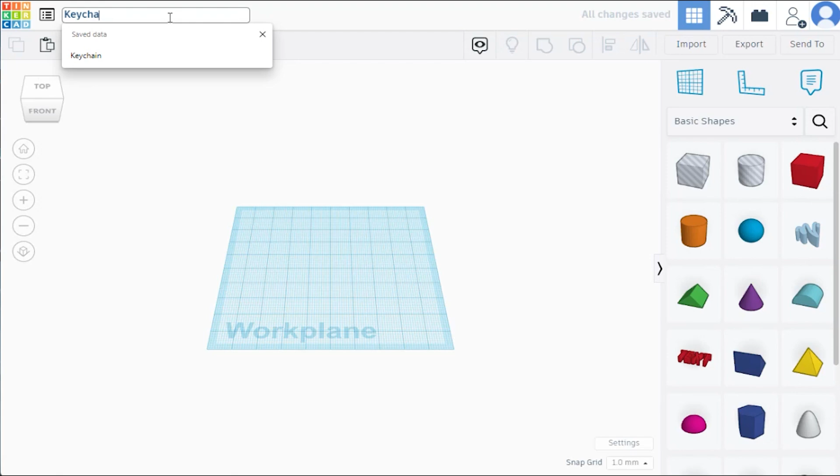Your first step, as with any project, is put a name on it. I'm just going to call this keychain. You can be more creative or less—that's just the easy one for me.

The next step is I'm going to bring out our base of this project. Now I'm going to take the mouse over here, and I'm going to drag and drop your block right from there to there.

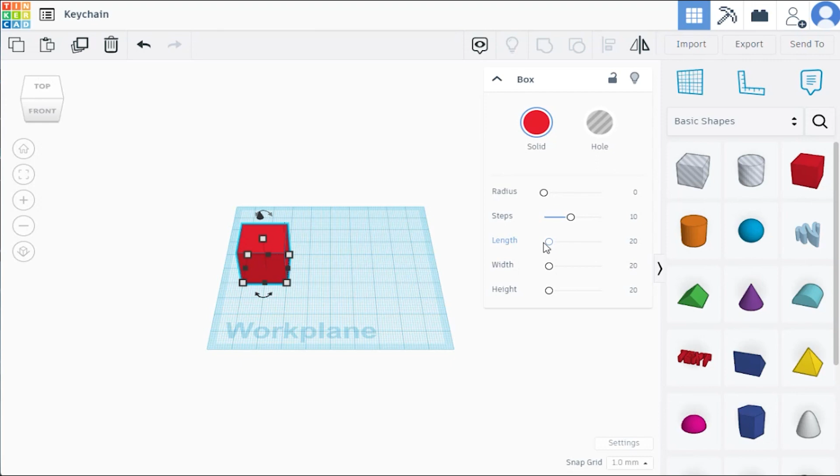Now there's 2-3 ways, depending how you look at it, for our next step, as we need to elongate and then put the measurements to this block that we need. So I can go over here and change it that way, or I can click on these white arrows and pull it long and wide. But what I like to do is click on the white, and it'll give these numbers, as I like to be accurate. So I would recommend 79 millimeters, and I'm going to recommend 22 millimeters.

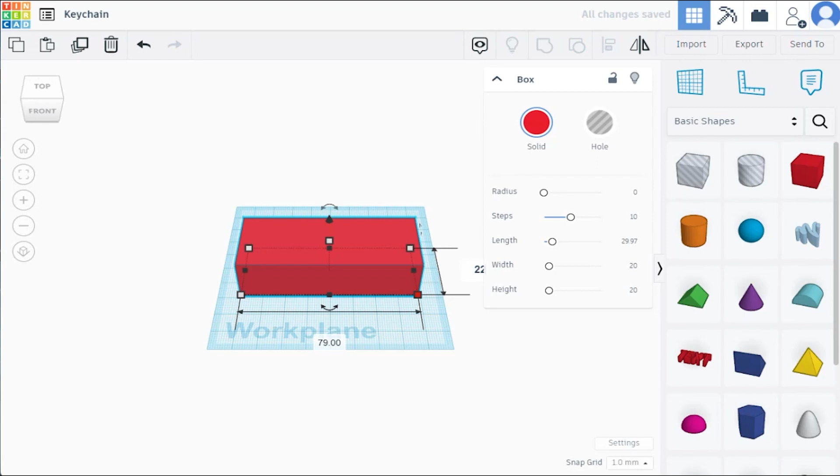Okay, and then I'm going to use the wheel on my mouse to just move this to where I want it, as I like it to be right in the middle, and I'm going to close this as that's not needed anymore. Now that, as we can see, is a little too thick, and if you're wondering how I'm moving the camera, I'm clicking on the right button on my mouse, and that's about it.

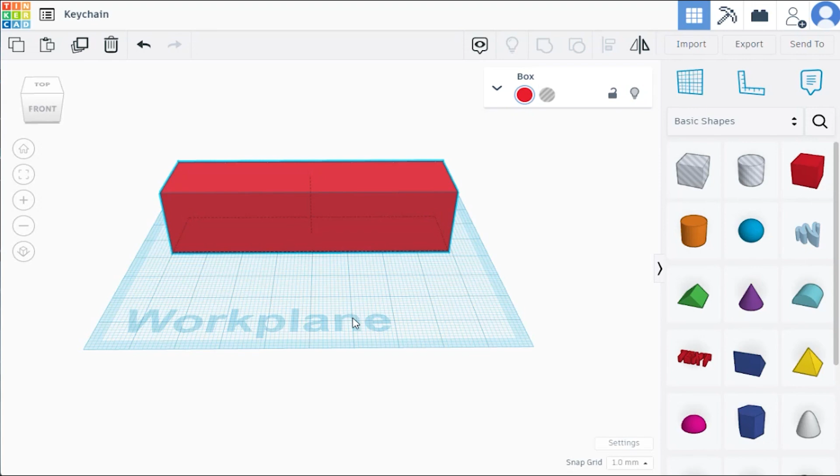I'm going to shrink this because it's a keychain, so we want it to fit in your pocket. I'll click on the white to set the thickness - you can drag it with your mouse, but I prefer to just type the numbers in. I'll click on the number with my left mouse and put 3. Now I have a nice flat surface to work from at this point.

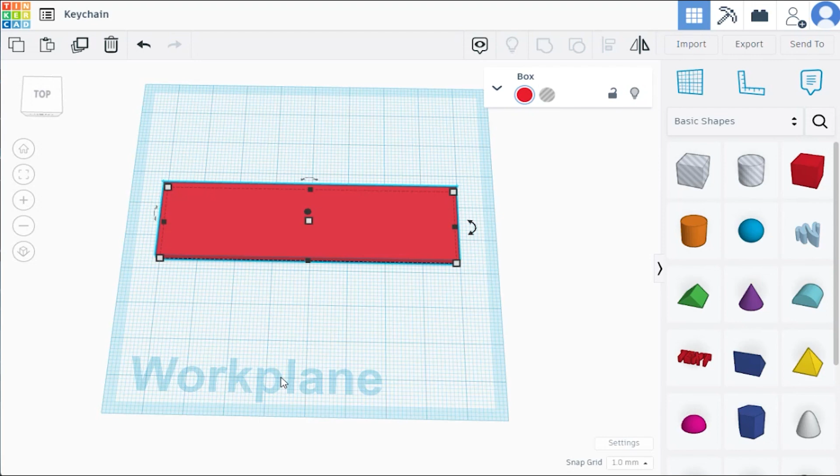The next thing I'm going to do is click off the screen with my left mouse so you can see the arrows disappearing. I'm then going to go over to the text and drag and drop it. I'm not going to put it on right away - I want to be able to make it look the way I want without worrying about messing up what we've got already here. So I am now going to bring this down. As we can see, we can move this by left clicking, and we can see the text.

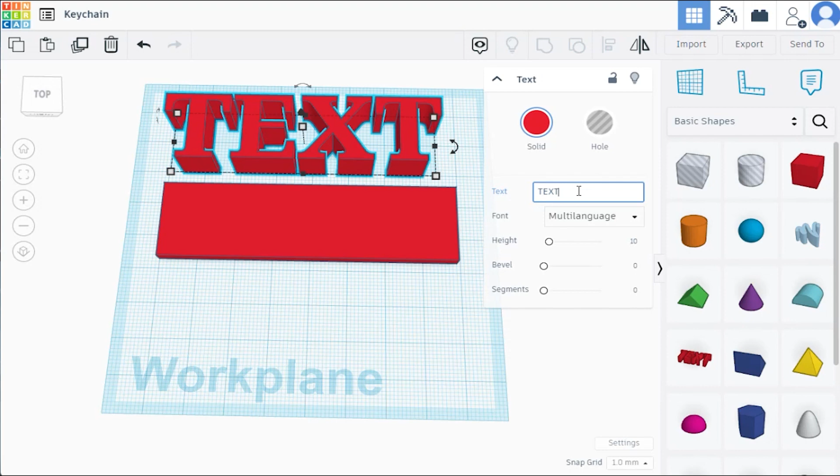So I'm going to put my last name on here, and we can already see a problem. How do we fix it? I can play with these, but I don't prefer that, especially with the text. What I like to do is just drag it until it fits.

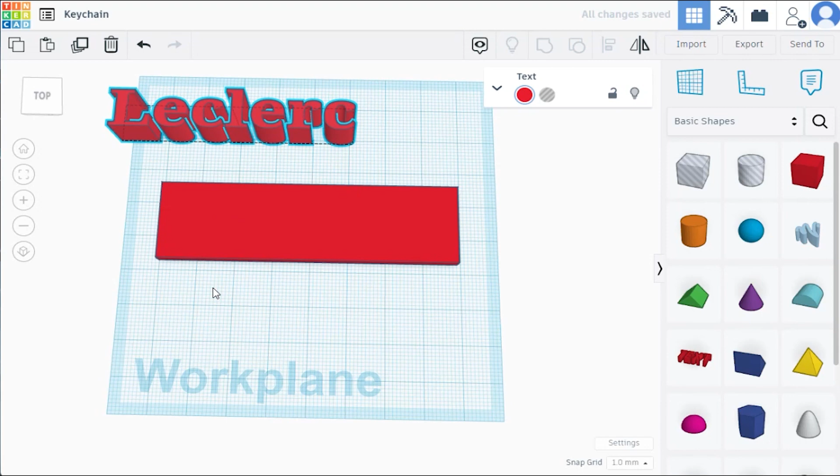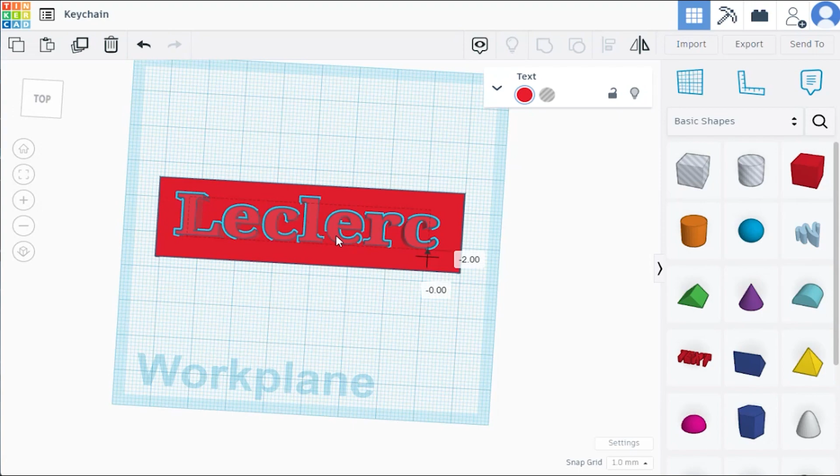Now I'm going to put it right in the middle. One nice thing with my name, I've got that L marker - as you can kind of see, my box is lined up on this paper right here. I got the corner there and there, so it's one box off. I'm just going to eyeball it in, and I like it just like that. I think that looks pretty darn good.

Now we can see that's way too big. If it was in my pocket, the letters eventually would get broken off. So I'm going to shrink this, and it's 10. Our thickness of our bottom plate is 3, so instead of 3, I'm going to double it at 6. That should be pretty good at that stage.

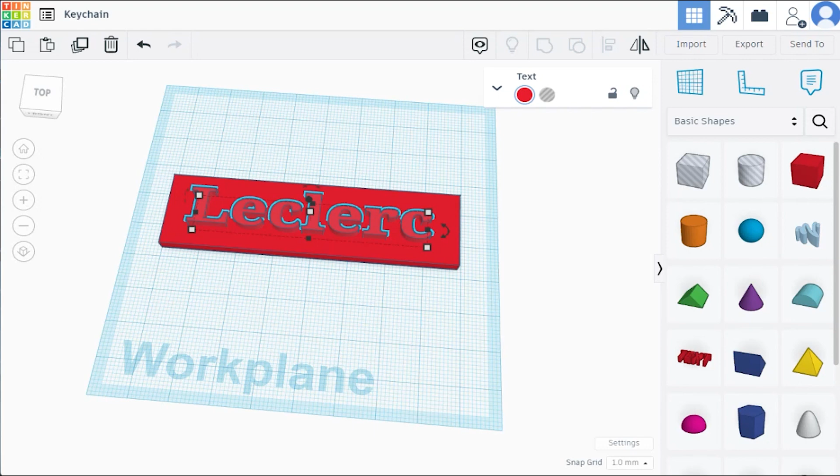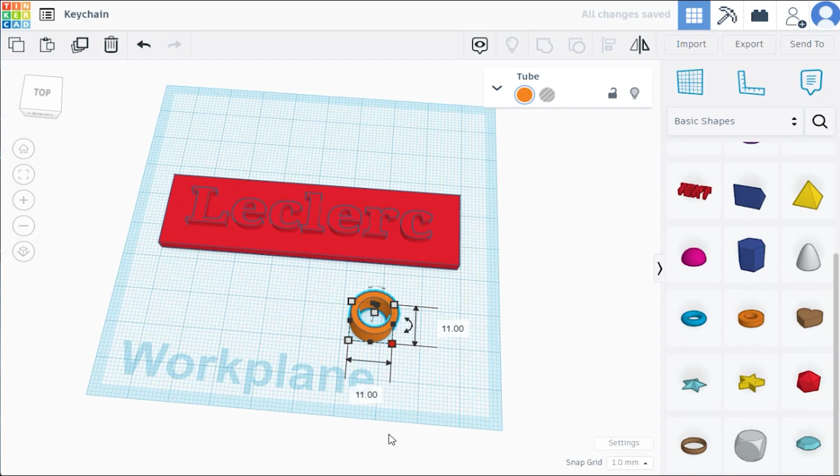So the last thing we need to do is create the ring. The ring is super simple because it's already in there - we've got our ring right here. I'm just going to drag and drop it on here. We want to have the ring at 22, so I'm going to go half, which is 11 by 11. I'm going to set the thickness at 3.

I am going to raise this nothing, because remember, this is 3, that's 6. I'm just going to drag this over and push this right in. Now the nice thing about this software is that there will not be a break if you 3D print this, and I'm going to show you another step how, and we're going to make sure that works.

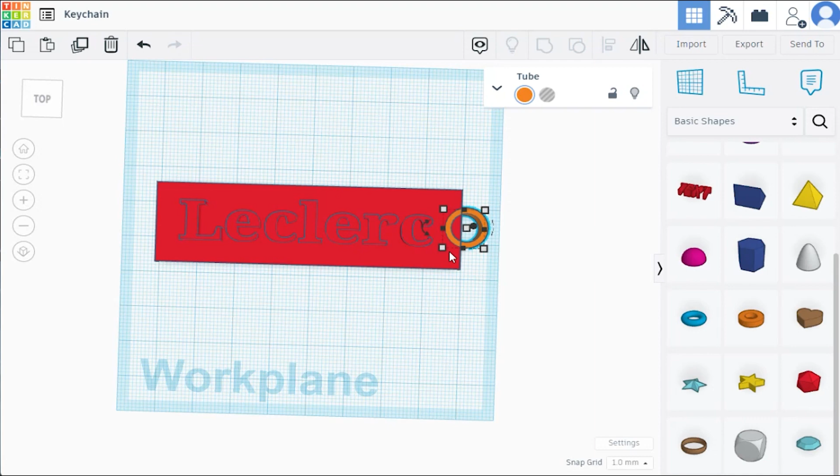So the last step here is we need to group the button. To group any object, I'm going to left click and drag that box over top, and go over here and click group. Very simply, all this does is attach all the pieces. As we can see, this is now one piece.

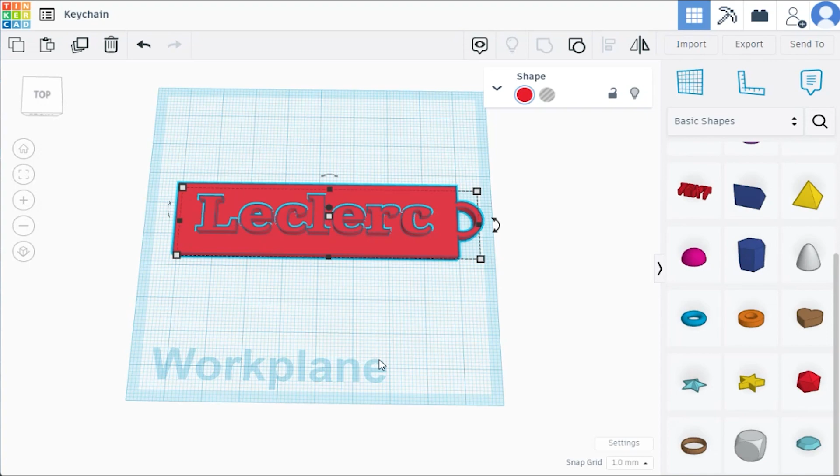And that's it - your very first 3D printed project or design.